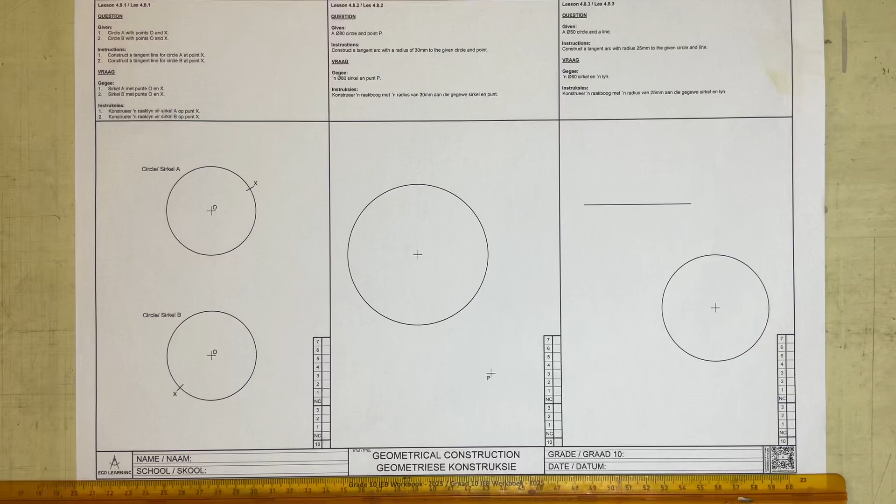All right, this exercise over here, they're asking you to draw a tangent to this point X over there. All right, so a tangent means it's a line that's going to go at a 90-degree angle from a line that would be coming straight out of O going through X over there. Right, to do that, well, that's fairly easy.

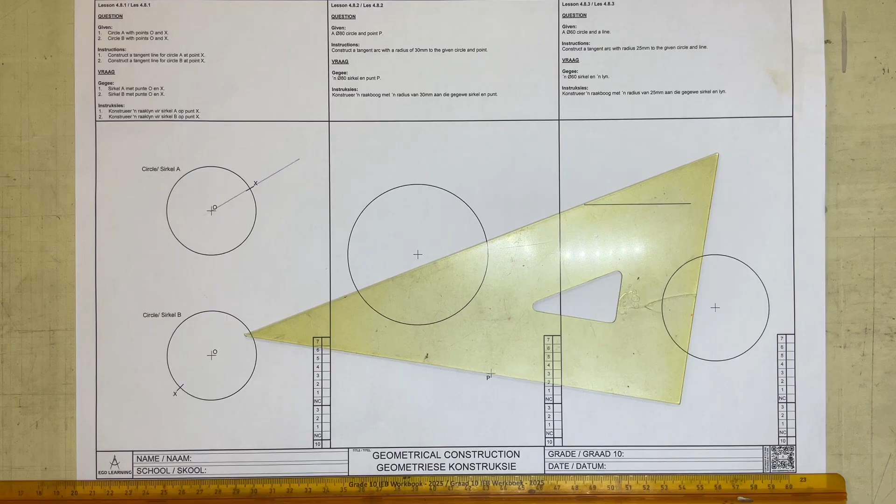What we're going to do is we're going to take our pair of compasses, we're going to place them on X over there, and I make a little arc on that side and the same radius arc on this side over here. Once I've done that, I can extend my pair of compasses out a little bit, and I draw a little arc over there and an arc over there,

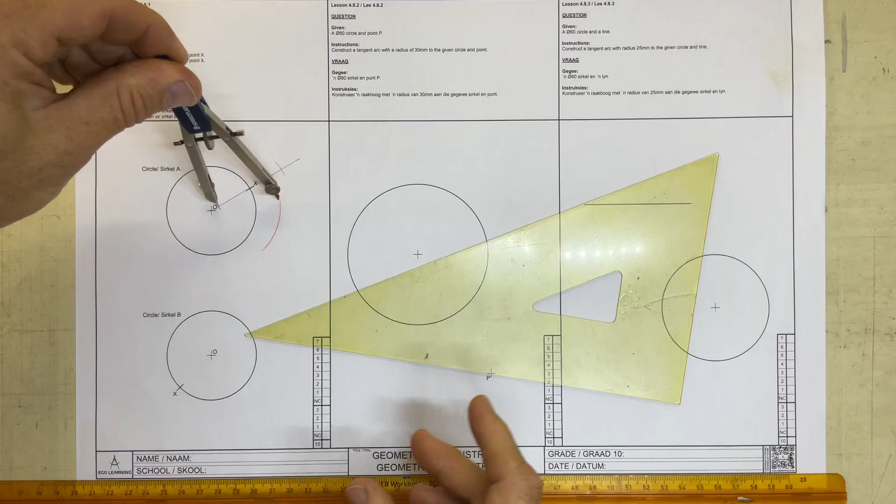and with the same radius I draw an arc over there and an arc over there, and I should be able to draw a tangential line going through point X, and you'll note that that gives me a 90-degree angle there as well. Right.

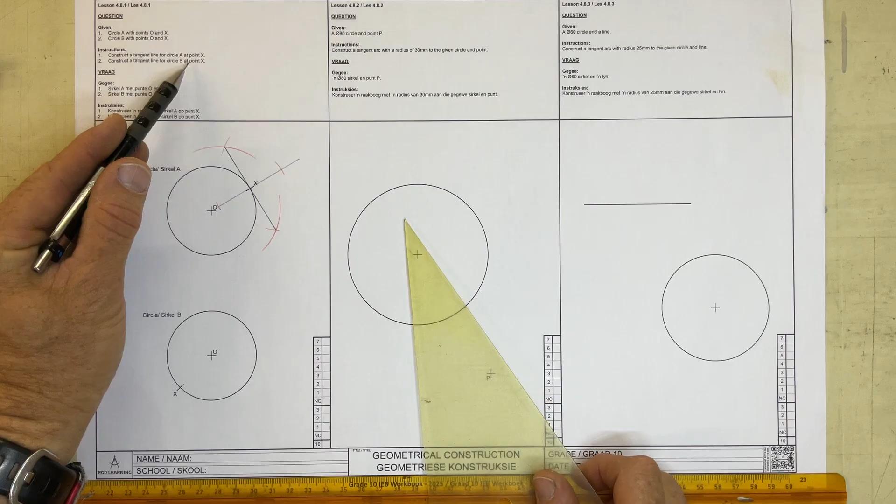Over here they say construct a tangent line for this B circle at point X. Exactly the same story. You're going to draw a line coming out over here, line coming out over there. Take your pair of compasses, place it in over there, wind it back just a little bit. All right, make a little arc on that side, make a little arc on that side. So that space is equidistant from that.

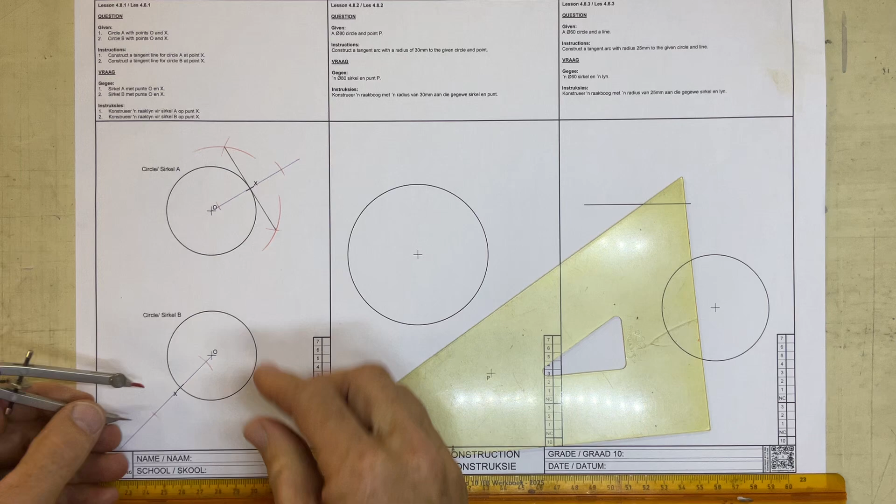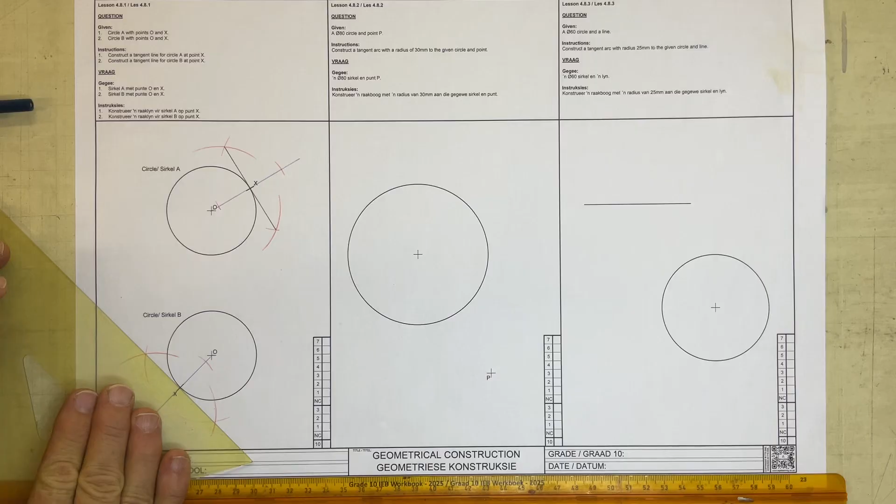Place it at that point, extend your pair of compasses out a bit, okay? Make a little arc on that side, make a little arc on that side. Go to that point, make a little arc over there, make a little arc over there, and you should be able to draw a nice line, a tangent going through point X over there. Right, once you've done that, come in over here.

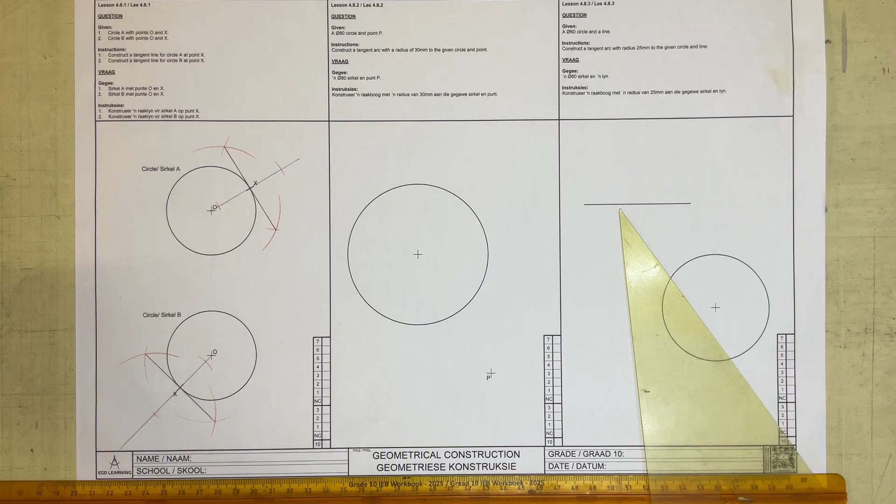It says, given a circle with a diameter of 80 millimeters and a point P, construct a tangential arc with the radius of 30 millimeters. Okay, so what I do now is I take my pair of compasses and I'm going to set them to a radius of 30 millimeters. I go into P over here and I'm going to draw a little arc. Don't be shy with the length of that arc, it's a construction line arc.

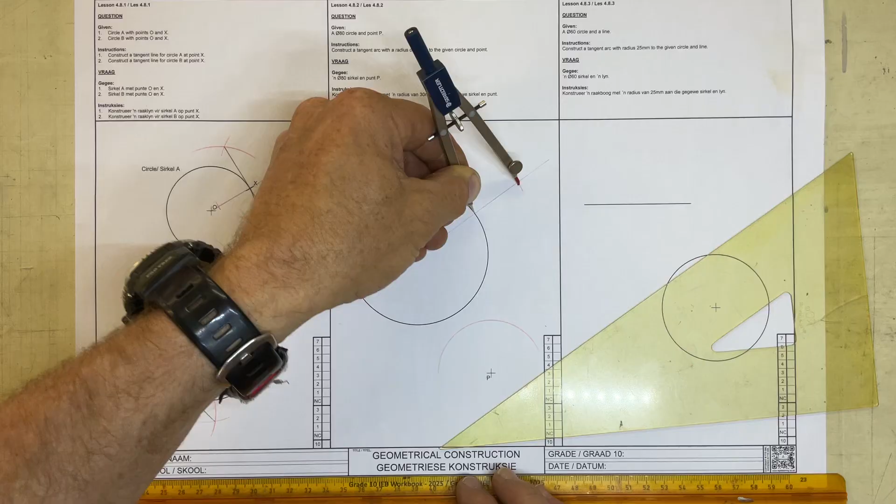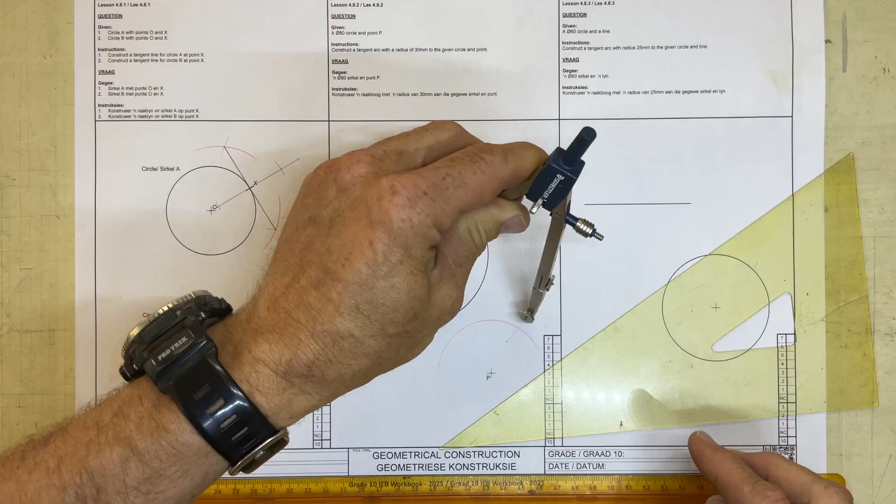I'm then going to just draw a line coming out from here, anywhere out there, and I'm going to make a little mark on there. All right, so what did I do? I added 30 millimeters onto this radius over here. Once I've done that, I'm going to take this bigger pair of compasses and I'm going to set them to the radius of the circle plus the 30 millimeter radius that was given, and I'm going to arc that down onto this arc that I drew with the radius of 30 millimeters.

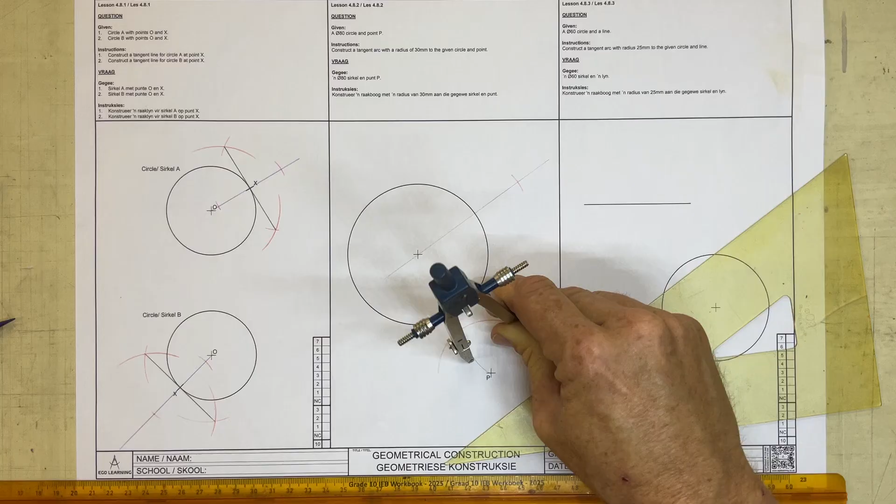I now take my pair of compasses and I set them to a radius of 30 millimeters, and I come into this point over here, and I should find that if I've worked accurately, it's touching the circle over there and it's touching the point over there, and I can draw a perfect little arc going from that point up to the circle.

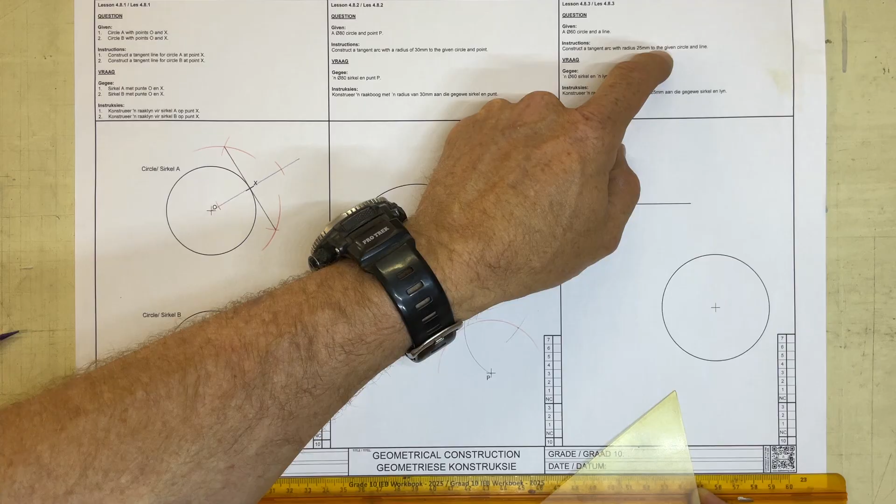Right, once you've done that, the next one says that you've got a 60 millimeter circle and a line. All right, it says construct a tangential arc with a radius of 25 millimeters to the given circle. So I set my pair of compasses to 25 millimeters. Go to that line over there. I'm going to draw a little arc going around. That is 25 millimeters. I now take my pencil and I draw a construction line coming across, making a tangent to that line.

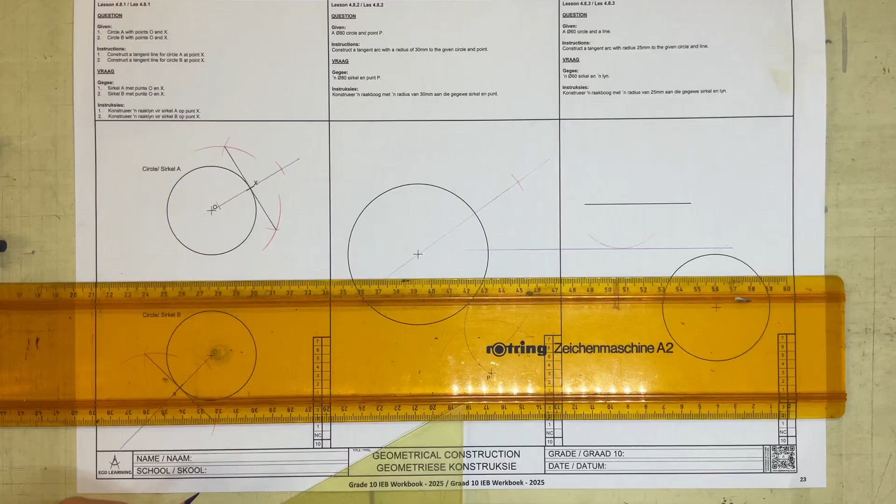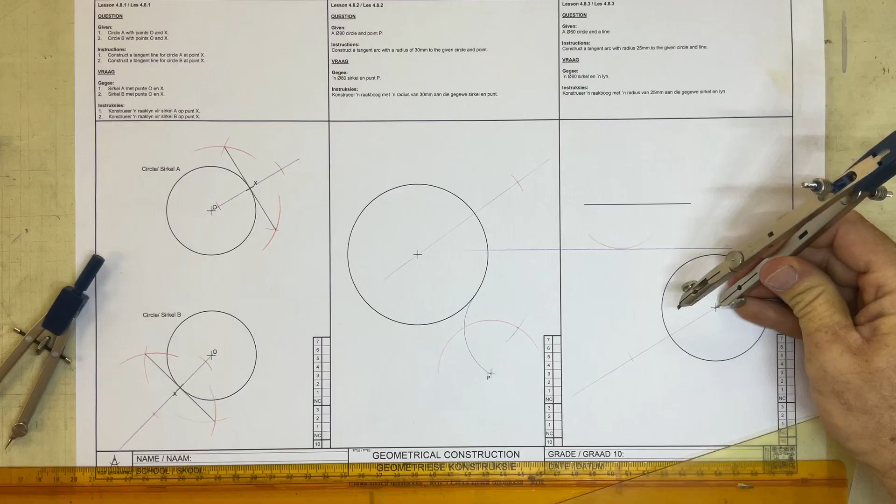Once I've done that, I'm now going to draw a little line coming out from the center of this, and I'm going to add that 25 millimeters onto that radius over there. Once I've done that, I'm going to take my bigger pair of compasses and I'm going to extend them out to that radius over there, and I arc that back until it intersects on that line over there. That's a construction line.

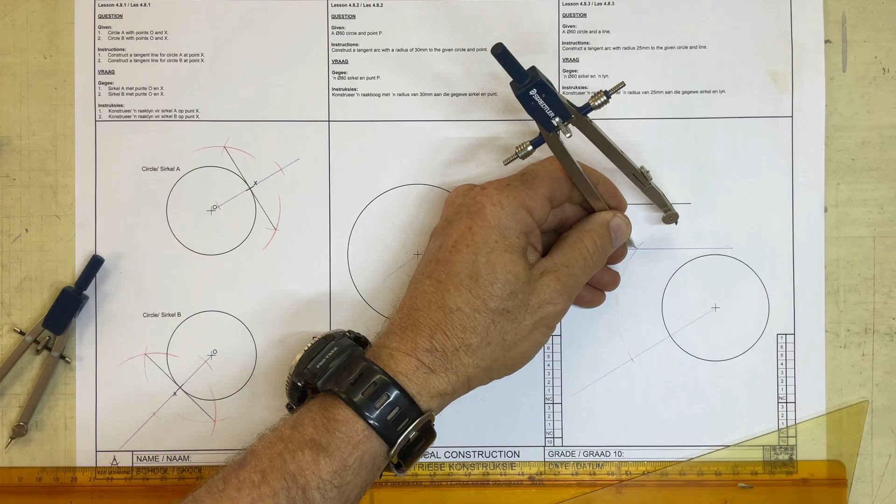Once I've done that, I then set my pair of compasses to a radius of 25 millimeters and I place it over there. Right, once I've done that, you should find that it will intersect perfectly with that and with that, and I can then draw in an arc which comes round and just touches the circle and the line. There we go.